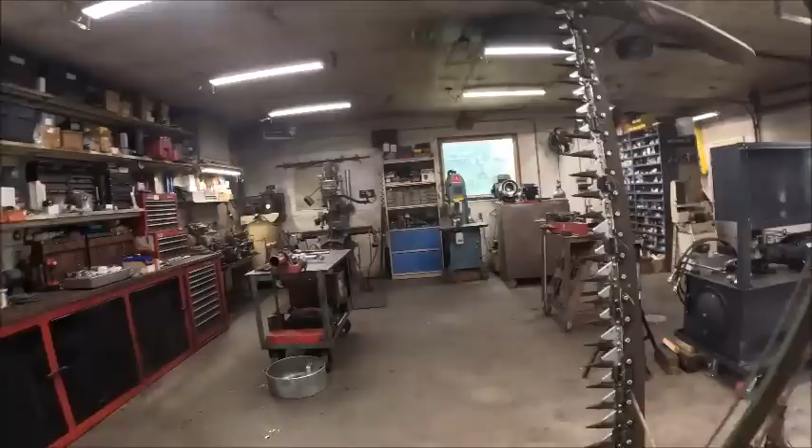Alright, today we're going to put some of these new parts on the mower, and I want to adjust or tweak some of these rock guards and see if we can't reduce some of the plugging.

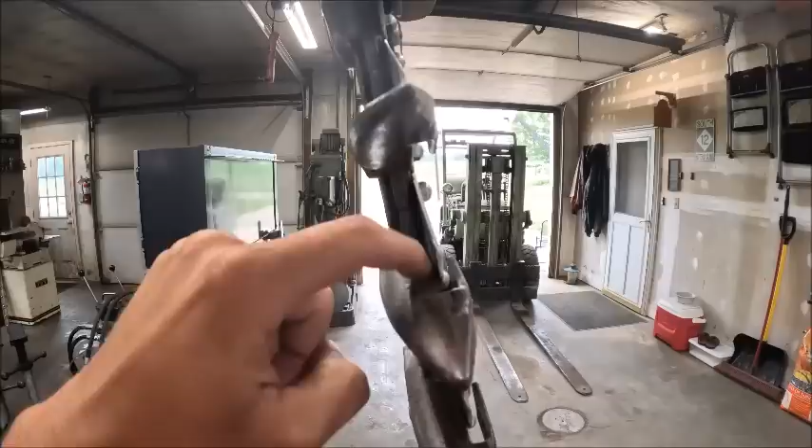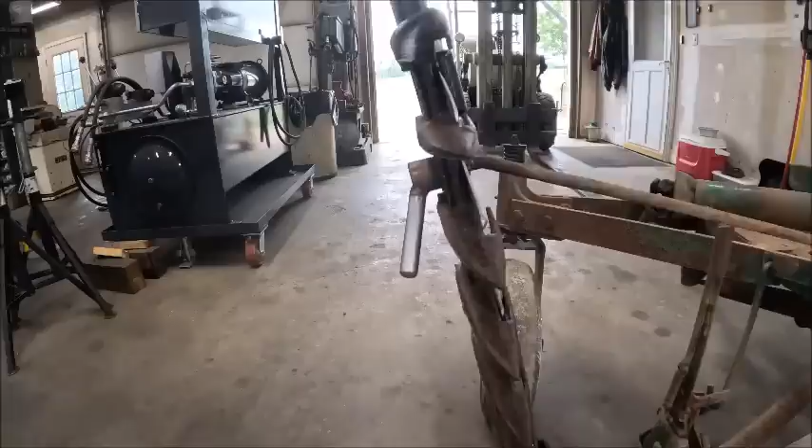Like that guy right there, he could probably stand to be bent up a little bit. Same with that one. That one's not too bad. That one could probably, that one's not bad. But I think if a couple of these up in here are, and then you get further down the bar and they're in pretty decent shape. That one right there could probably stand to be tweaked.

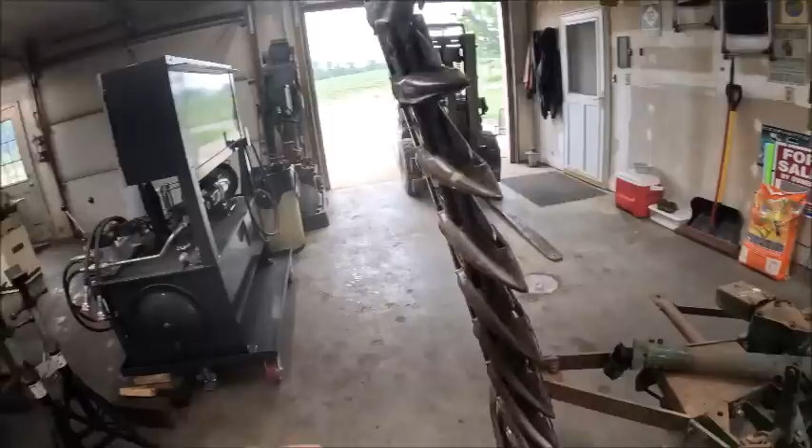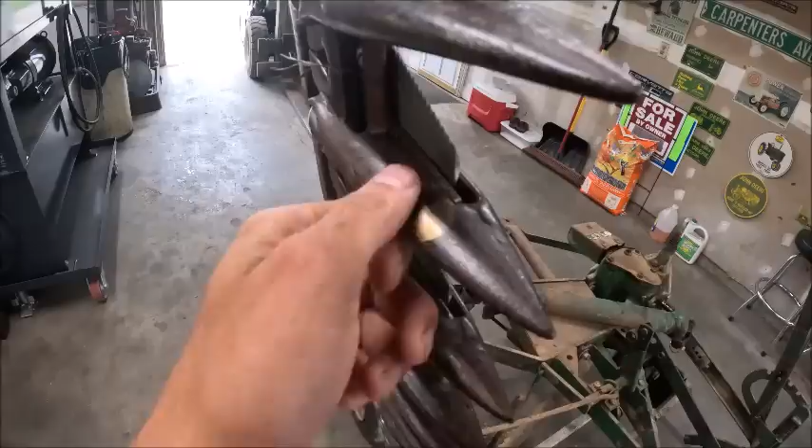One thing I noticed after I mowed with this, which one is it? Oh, this guy right here. Apparently this one's been broke before, and you know, Depression era farmer mentality, that the guys who grew up in that era saving everything, and we don't need to go get a new one. We just braze that thing back together, which they did a really nice job, because until it shined up you could never see it. So that one's actually been fixed.

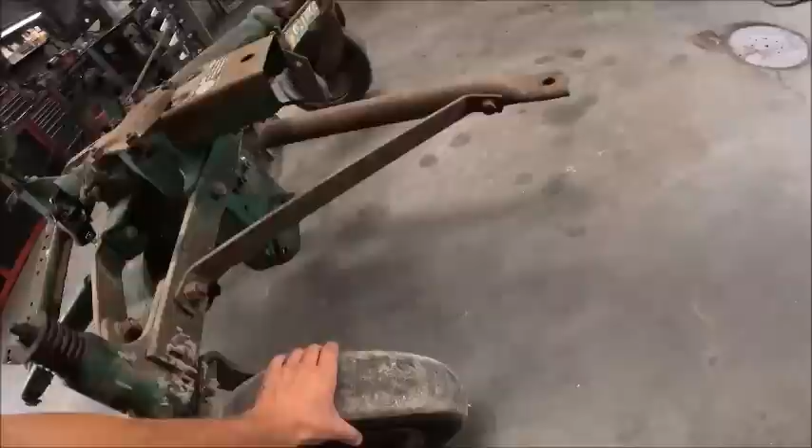But first thing we're going to do is put a tube in this thing. I got a different actual name brand tube, not just a TSC box tube. So I'm curious to see what actually caused this thing to go flat.

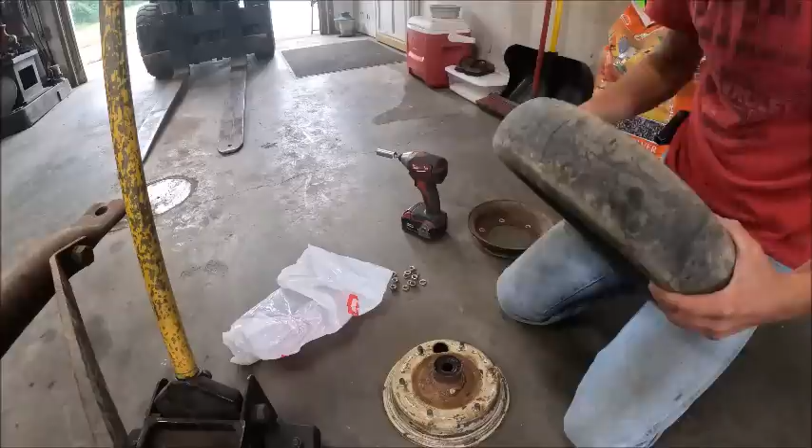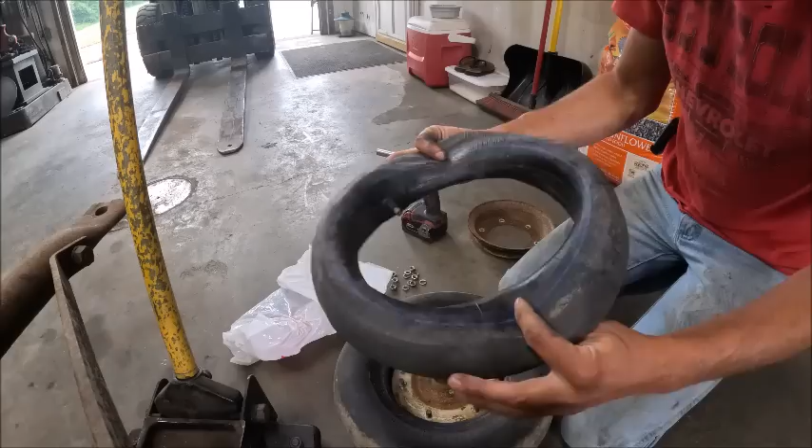Oh, well, that'll do it. The dang valve stem came unvulcanized from the tube. Garbage. Well, at least I know there's nothing wrong with the tire, so I can put this back together real quick.

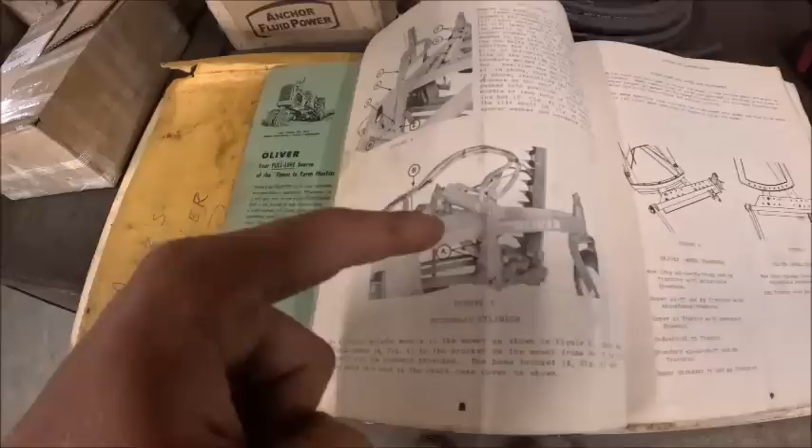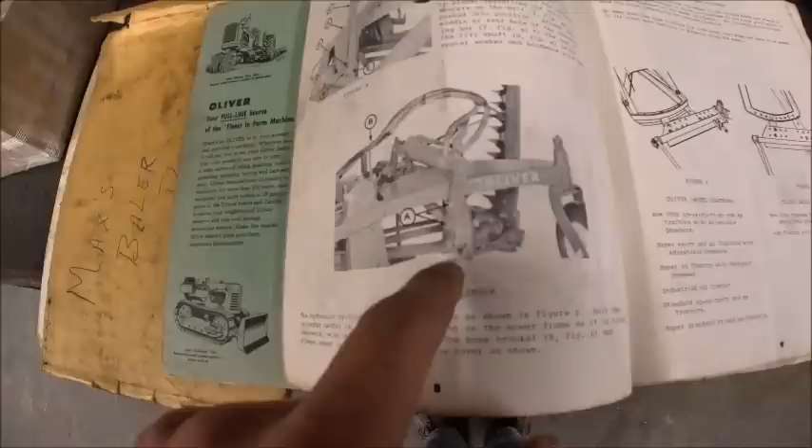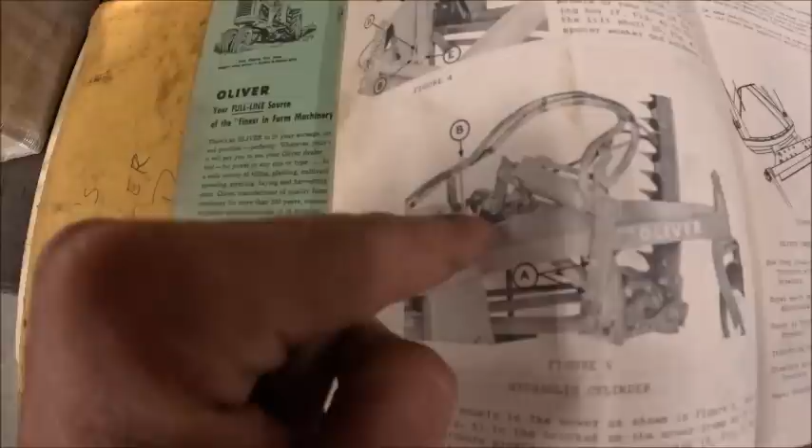Alright, so we can get this cylinder bracket and everything put on and get the lever off, and there is this right here, the installation instructions for the hydraulic unit, or for the hydraulic lift. It says you want the bracket installed tilted rearward, which the way the bolt pattern lays out, it'll mount either way, but they want it laying back. And then the hose standoff mounts on this back corner bolt or back corner stud on the gearbox.

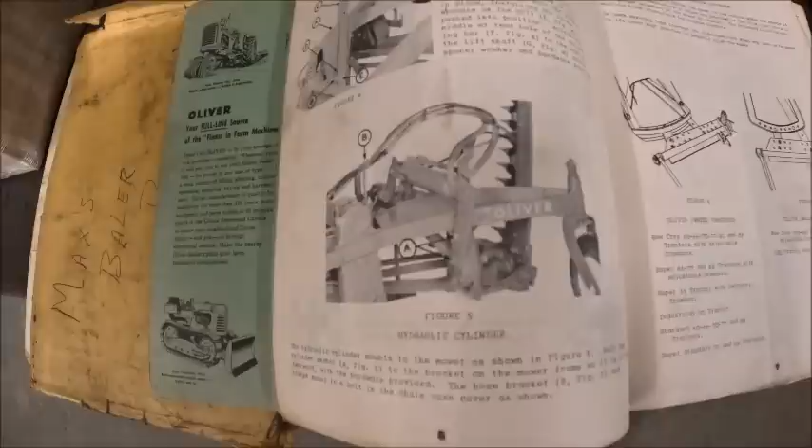And if you look right here, that little guy right there, that's your wire for the hydraulic.

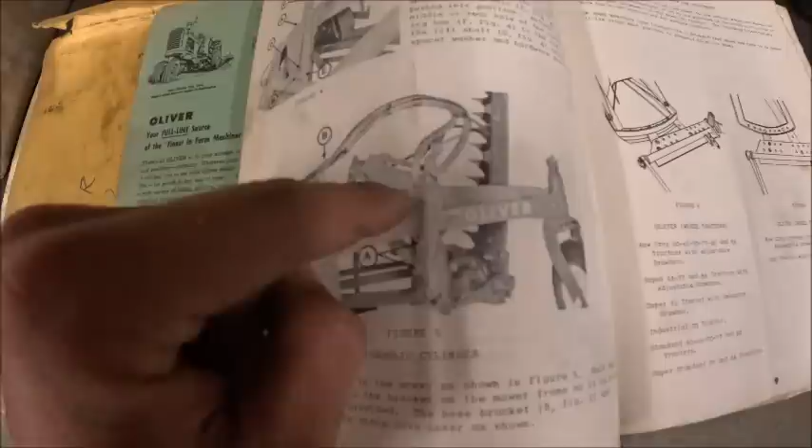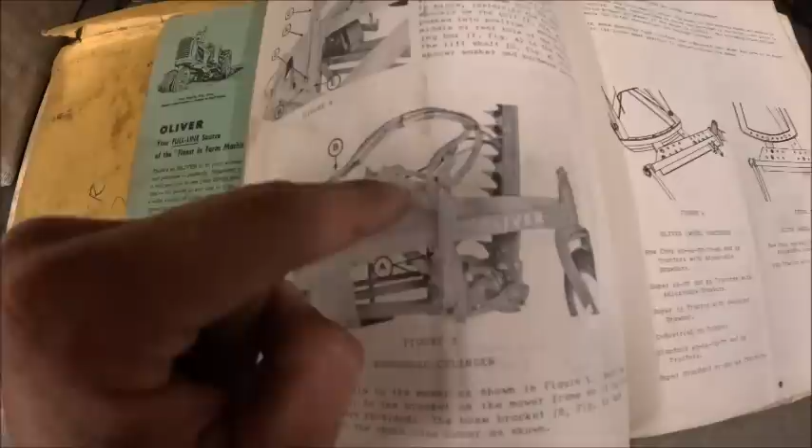Then this is actually, this would be a second gen. I kind of forgot about this cylinder. So there's a first gen, a second gen, a third gen. There might have been some other ones in there. But this is actually the same one I've got on my 540 planter. It's a welded steel tube, and the end gland's held in with a snap ring.

So we're putting the heavy cylinder on it, because that's the one I've got laying around loose. I've actually got a second one that I found yesterday when I was doing some stuff in the barn, and I don't remember what it came off of. So, well, I got more than two, but there's another one laying down there loose. But anyhow.

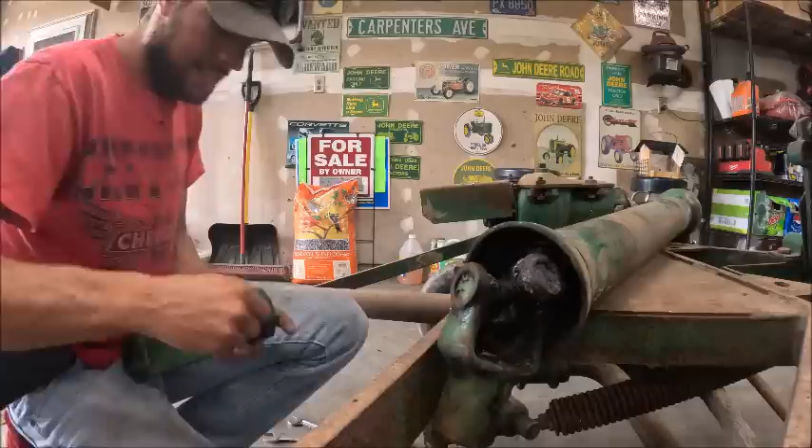Hose bracket. Tilted back, which is going to be in this position here. Did I say hose bracket? I meant cylinder bracket.

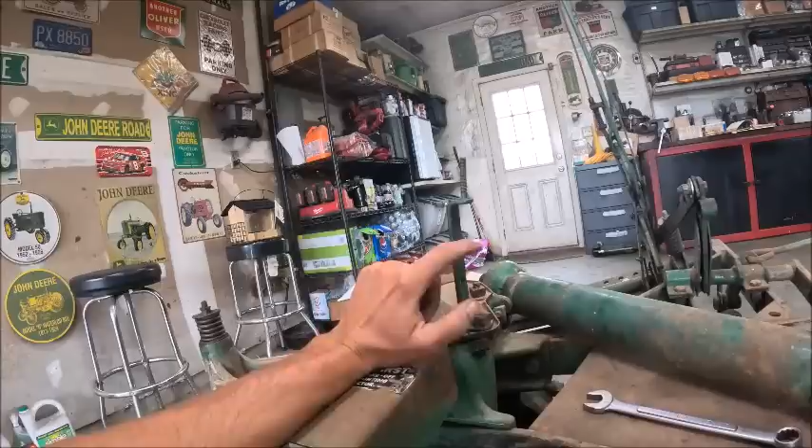One thing that I'm missing, because it was hard to tell in the parts book exactly what this was. I was expecting a round rod like all the other stuff. I wasn't expecting this. I'm missing the hose clamps, and I might have some up there on a planer possibly, I think.

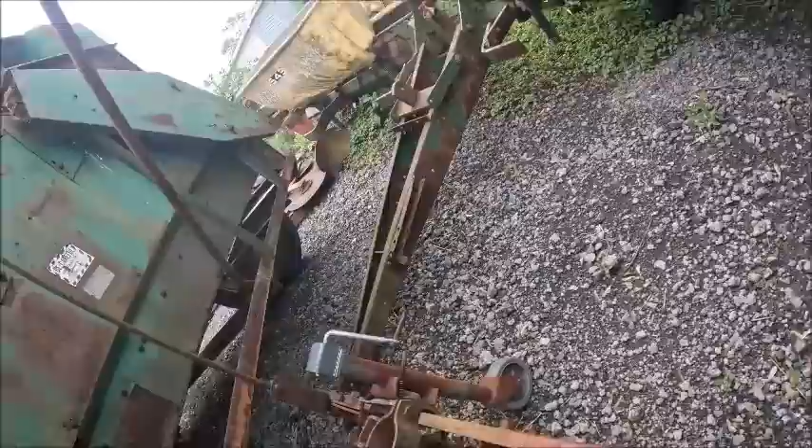Alright. Well, that would figure, both of these are, oh no, this one's got it, but it's wrong. This is what I was expecting it to be. That one's missing completely. Because this is what they're supposed to be, is just these stamped steel.

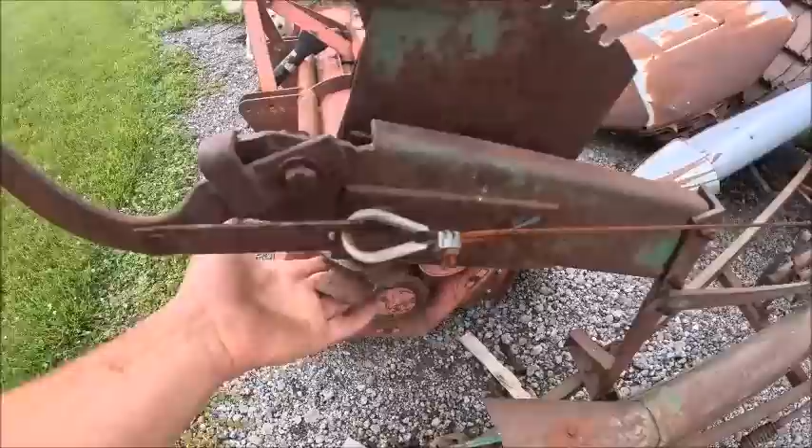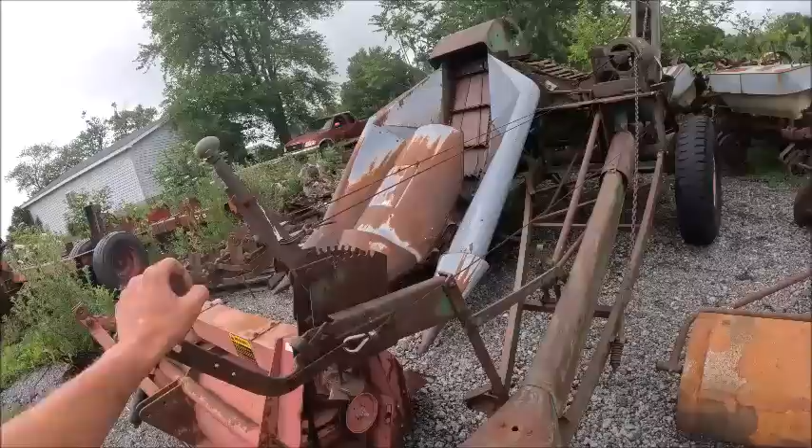I just don't want to steal them off the picker. Not that I'm going to use the picker anytime soon. I just don't want to rob any parts off of it for anything. I don't think I've got any laying around anywhere else either.

Well, let me go look. Otherwise, it shouldn't be that hard to come up with something in place of it. We don't got any hydraulic lift plows for parts. Well, I do. That hydraulic lift plow is for parts, but that's a different style. Actually, that hydraulic lift plow is not for parts. I want to get it, I want to redo it, because that's a hydraulic lift model 100, which we don't have any hydraulic lifts other than that one. Or no, was that a 100? Or that might have been a 214B. That might be a 214B. I can't remember, it's been too long since I saw it. Anyhow.

Okay, now the finger pinch and lever assembly can come off.

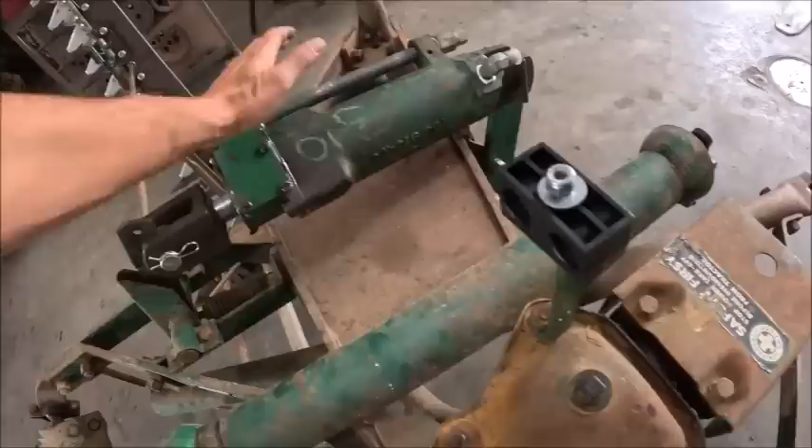Alrighty. No more lever, okay, cylinders on. This is what I came up with for hose clamps for the time being. I'll probably try to find some original steel ones eventually, but these will at least get us going. Can't make the hoses till we got it hooked up to the tractor, that way we know how long they have to be. But next thing I'm going to work on is the divider board.

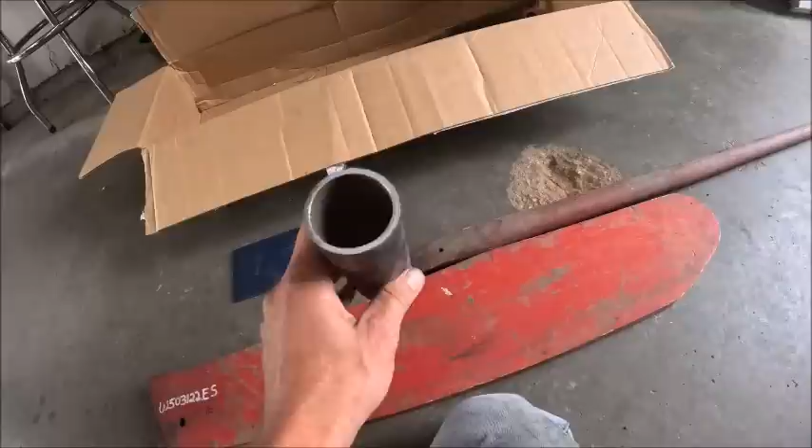And for that, we have to make a way for this to attach to it. The steel one that replaced that has two holes, and it's got this kind of duck-foot shaped piece stamped out on the end of it. So I'm going to try to mimic this-ish.

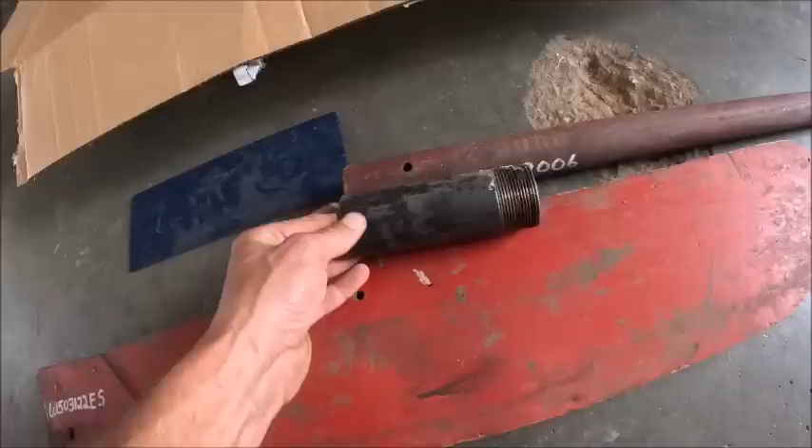The extension stick doesn't quite fit in this pipe, but if you split it lengthways, it'll probably spring open a little bit. Actually, I'm probably going to have to find a longer piece anyhow, though. It should be alright, because I'll just cut it off right here. Cut this at an angle and weld it on here to act as a socket for this to go into, to support it, and that'll be the plate on there like that. So it shouldn't be too difficult.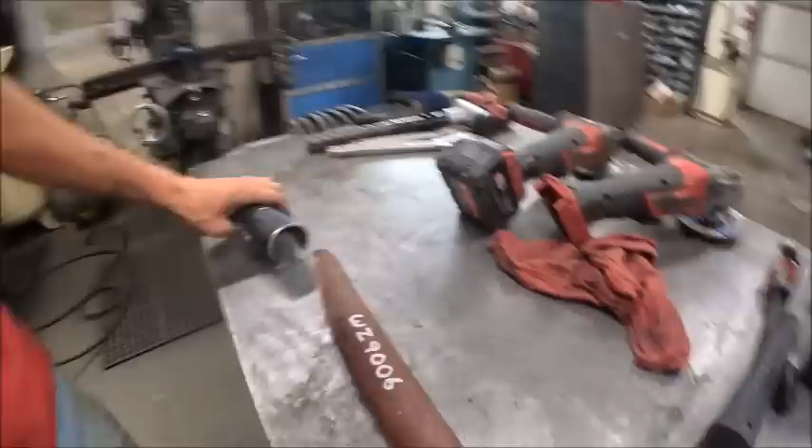Alright, there's what we come up with. I thought about cutting another piece of plate and boxing this right here, but I decided against it because if this thing ever breaks, I don't want to have to work that hard to try to get it back out. So if this is open right here, it gives you something to drive a screwdriver or something in and get it pried out, rather than having to drill the thing out and take it out in pieces.

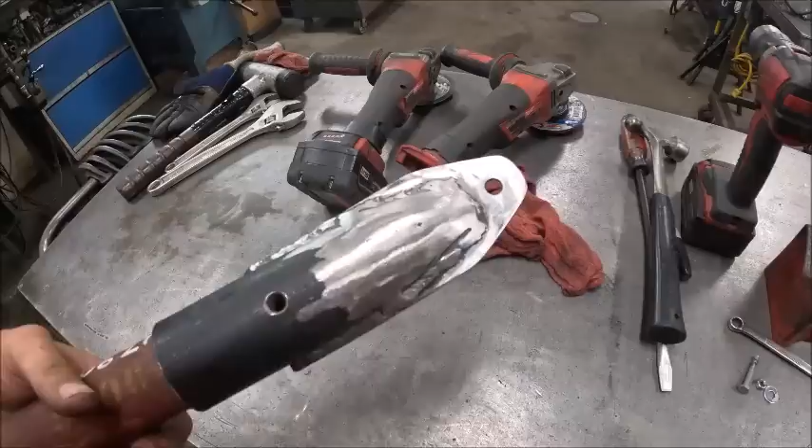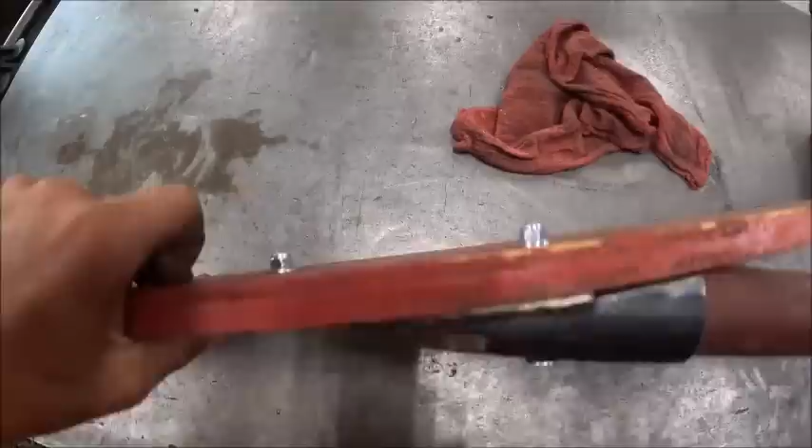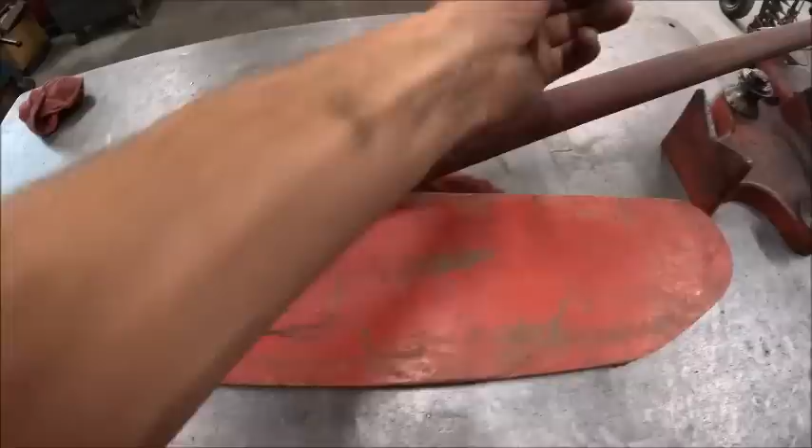So let it fit nice and tight, bolt holes line up, so it should work. Just got to find some carriage bolts long enough and square the holes out real quick. Not gonna lie, that turned out even better than I had it pictured in my head. Started it off in the middle hole. That's probably not too bad. Throw some paint on it, make everything match. You probably never know it wasn't factory.

But now we can lay the bar down and we can put that on.

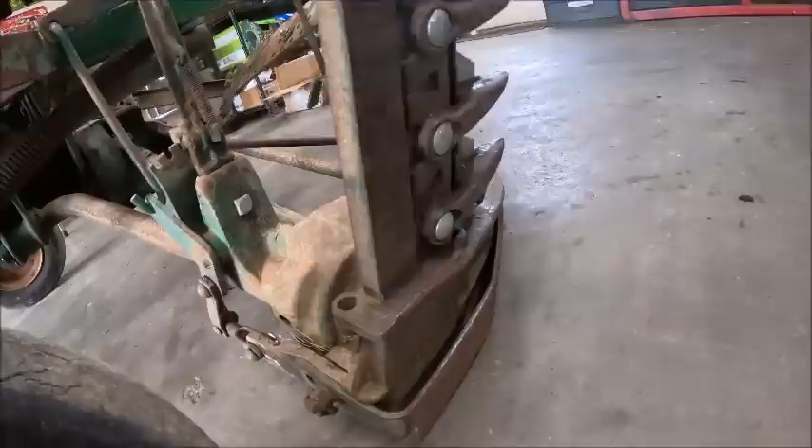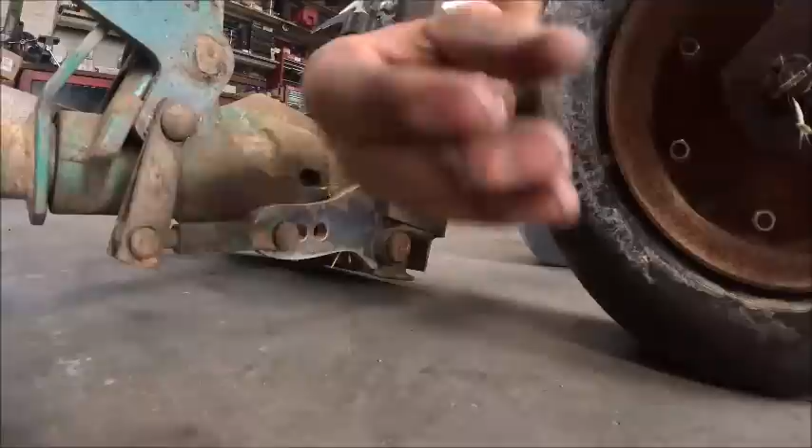Before I lay the bar down, while I got it up, I want to adjust my cutting height a little bit. It sounded like the vast majority of people kind of agreed that it needed to be leaving a little bit more stubble. So if I drop this down one hole, that should give me another inch. So I need a 3/4 inch wrench.

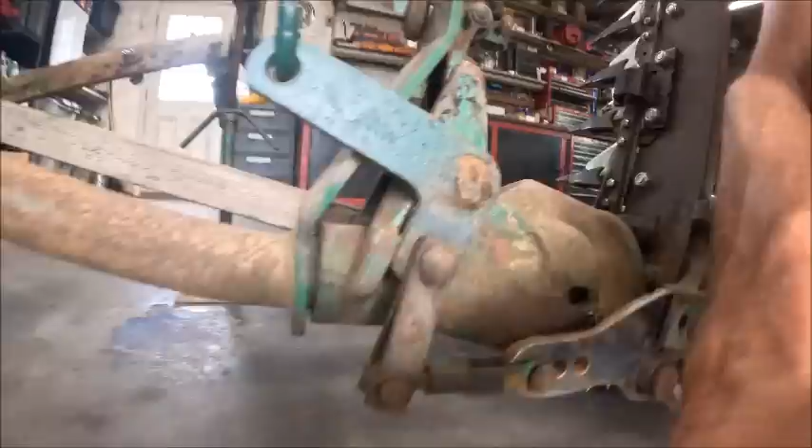Except this is not going to let me lift the bar up because I can't take the bolt out, so we're going to have to lay the bar down anyhow. Well, I don't know how that got so tight.

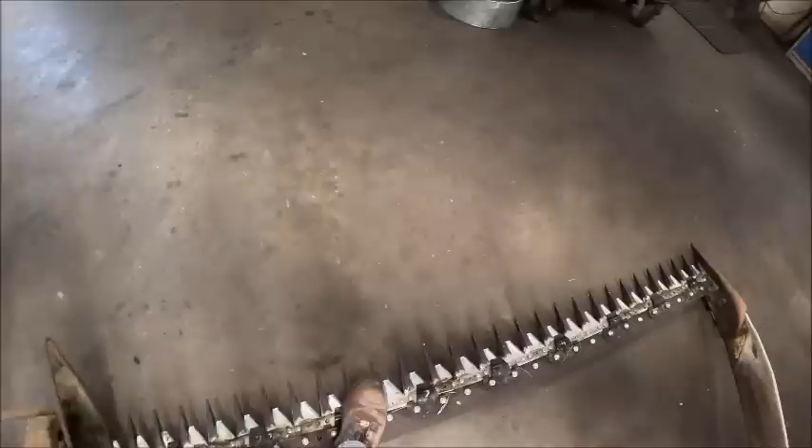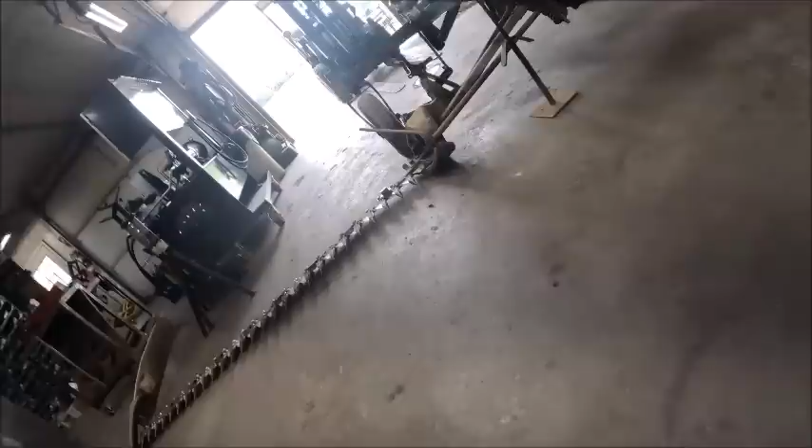Okay, now we can adjust that. You know, I wonder, is that side on the ground? Yeah, that side's on the ground. Granted, the bar is going to be bowed somewhat in the middle. Where are we at here? Oh, that's 2 inches. Let's give her a little more.

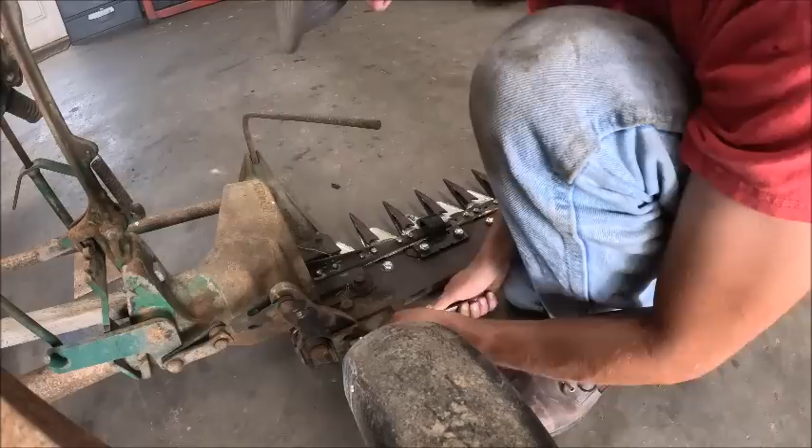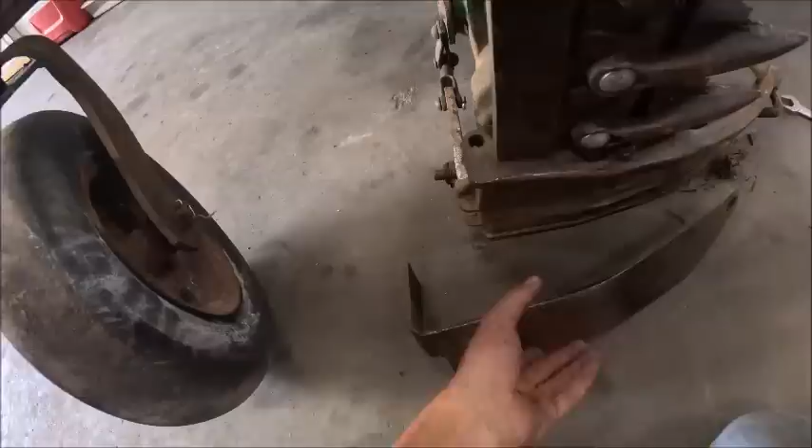Come on. Well, I don't think you can actually see what I'm doing there. Here, now you can see what I'm doing.

Sounds like the neighbor's cutting hay. I hear a discbine. So now it's going to rain again.

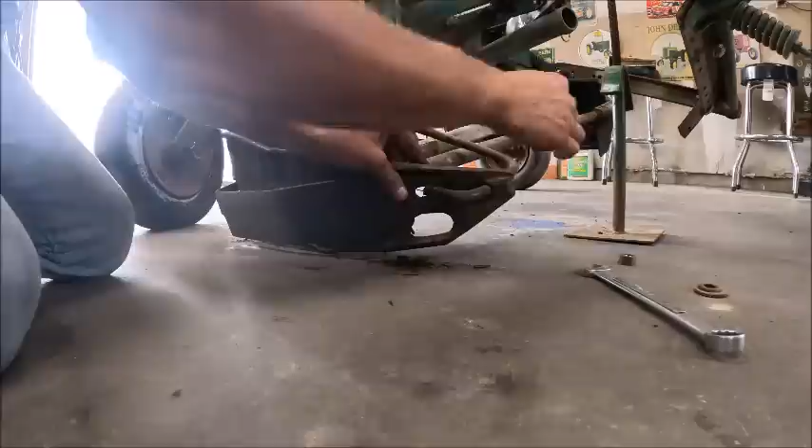So as it would turn out, it's easier just to do it with the bar up and undo the front and rear bolts on the skid shoe both, and then you can just go right together with it.

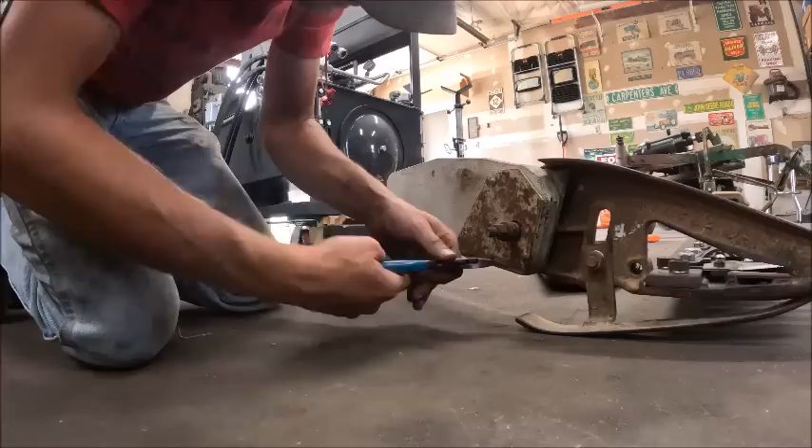Alright, I got both shoes dropped. That got me to about 2 3/4, a little over a cut height. It looks like a lot more than that, but that's what it measures, so that's what we're going with. So now we can swap out our windboard here.

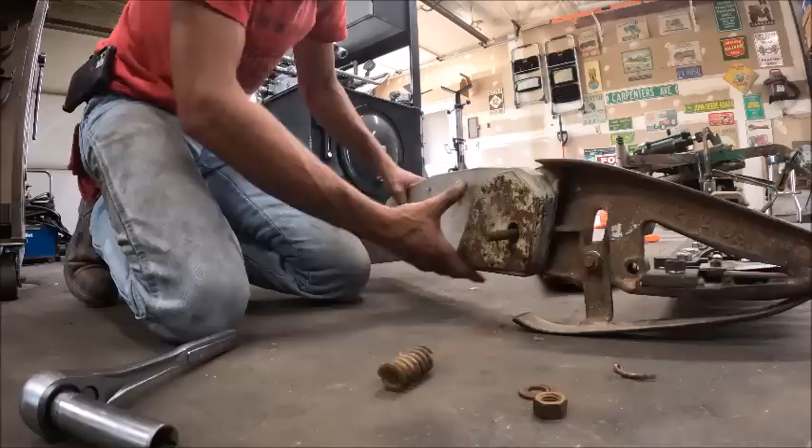Swathboard, divider board, whatever you want to call it.

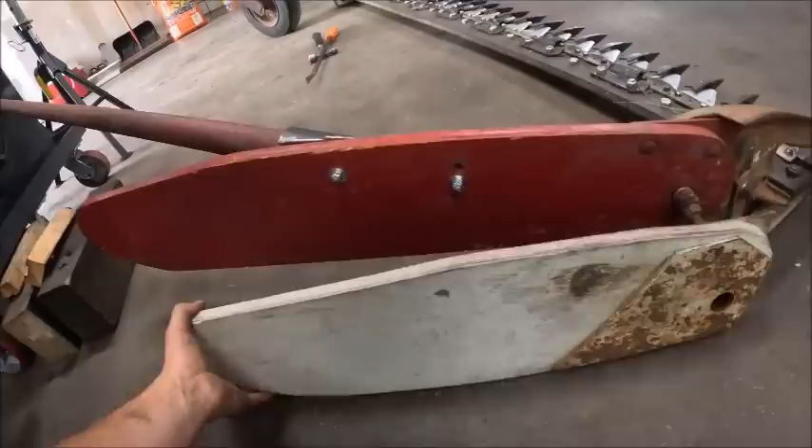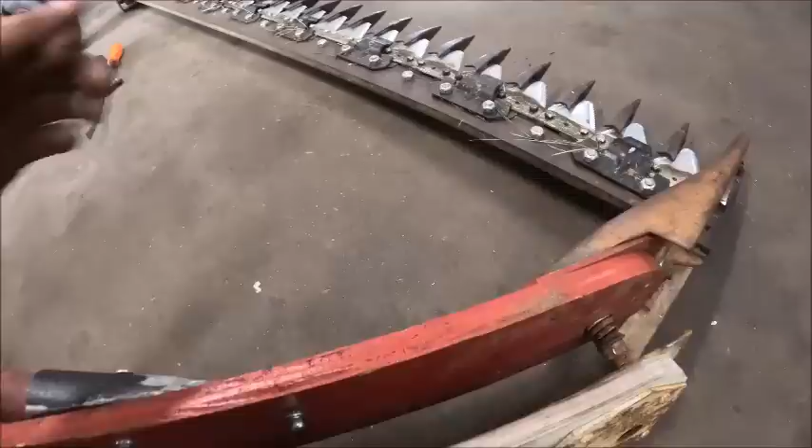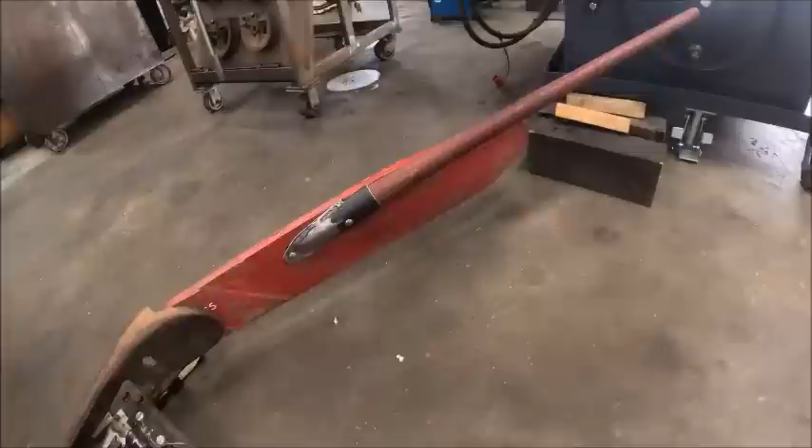And that one is pretty significantly longer. But it looks like this one was probably shorter to begin with. But we'll see how it works. I'm hoping it, like I say, I hope it leaves a wider track for running the mower head in, because before it was only, I mean, it was barely wide enough to run that in, so hopefully we'll see.

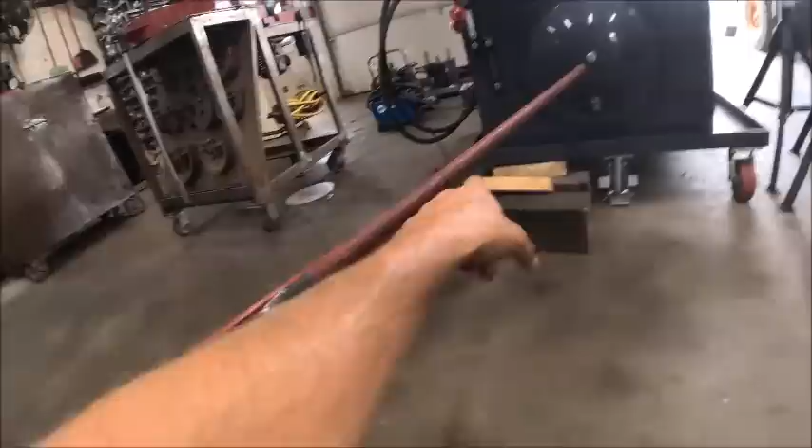Now I know for certain that the extension stick is going to help, and it might not be a problem, at least this year on second cutting, because second cutting's coming back so slow due to lack of water, even after we got rain. But especially on that first cutting I was doing, there were spots where the grass was tall enough that you'd be driving along and it would start to lay over, pushing on the grass cut over here, and it would get to the back of the swath board, and the pressure would flick it back over on top of the uncut hay. Then you'd have to try to run over that without plugging up by the cutter head or the drive head on your next round, and it just makes a bit of a mess.

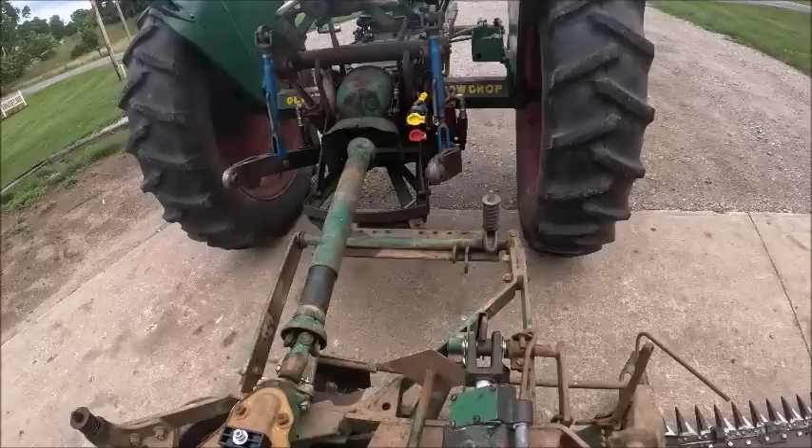So that for certain ought to help. I hope. Would be nice. That's the way it's supposed to work anyhow.

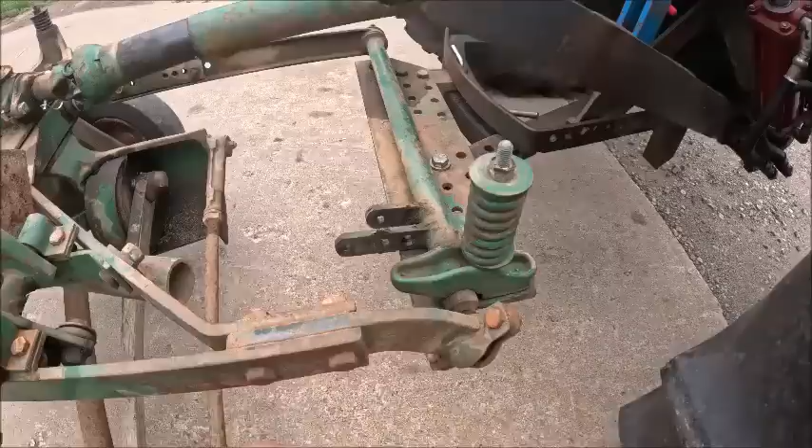I tell you what, this thing is like 20 times easier to hook up without that handle on there. Now that the drawbar will swing all the way over, you just stand it straight up on end, back the tractor all the way up to it, flip it over backwards, and that lets it clear everything. Because you stand it up with the spring down, you can flip it all the way over. Once you back the tractor up to it, everything pretty much lines up. You can pick the floating side up enough that it'll let the tab slip in - it's easy now.

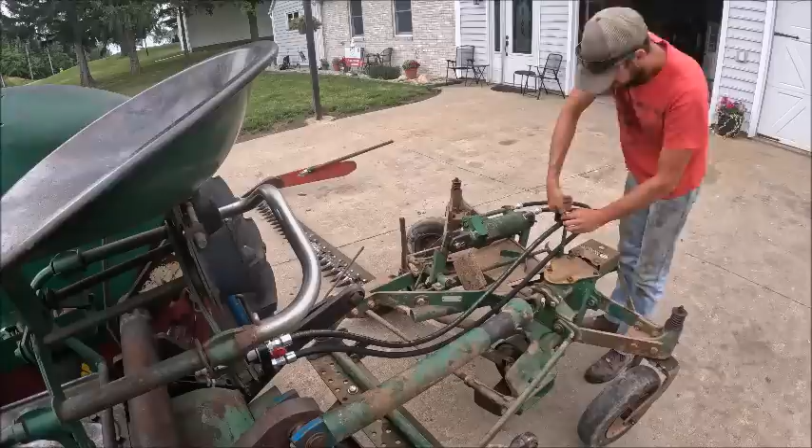So all we gotta do is make some hydraulic hoses, and we should be good to go.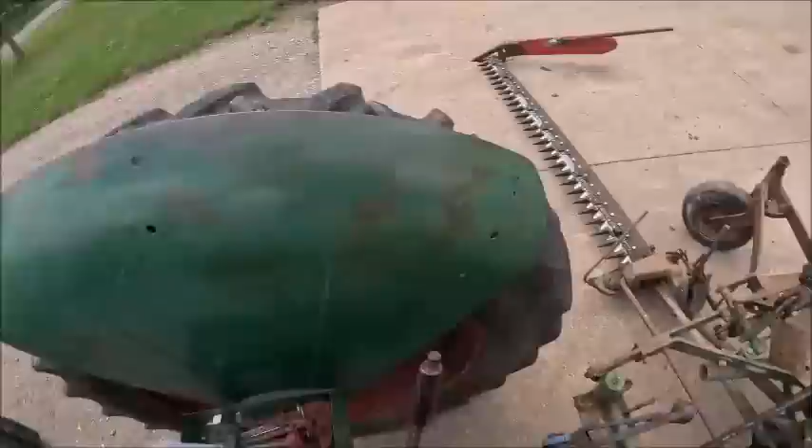All right, hoses are on, everything's tight, so I guess all that's left to do is put oil in the cylinder. And see if I got the hoses hooked up. Oh yeah, we're hooked up the right way.

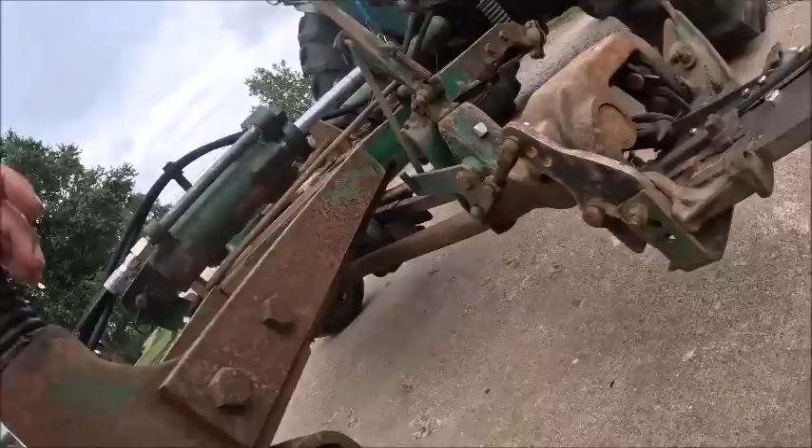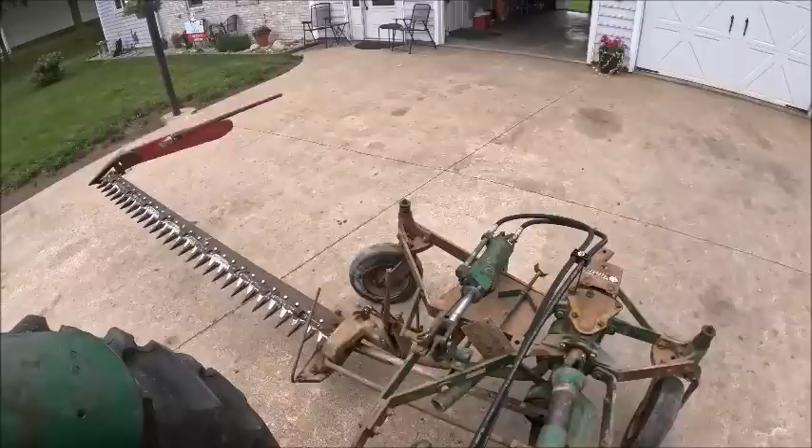That is so much nicer. My God, you guys have no idea how excited that makes me. And it picks up a heck of a lot higher too. Which is nice.

This is gonna make mowing that patch so much easier. And just mowing in general. It sets down nice and easy. Oh, that is beautiful.

And being able to feather it like that to finish up cutting your point rows and stuff without having to hold the dang handle is gonna be spectacular.

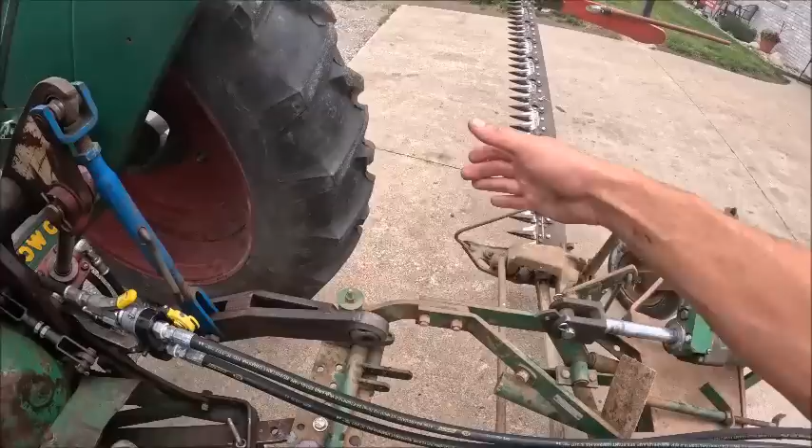That is going to be so nice. And the other problem I was having with the handle, especially cutting on that hill - if I was cutting with the bar downhill, the 3-point arm, because the handle would be back here, the 3-point arm would swing over here because we're downhill, and then you're on the outside of the handle. Then you come to the end and try to pick up the mower, and you'd get all tangled up in the 3-point arm, and you couldn't get the handle far enough in to latch it. So you'd have to stop on a flat spot, let the mower back down so the 3-point arm would swing in, and then pick the mower back up, which was a little unhandy.

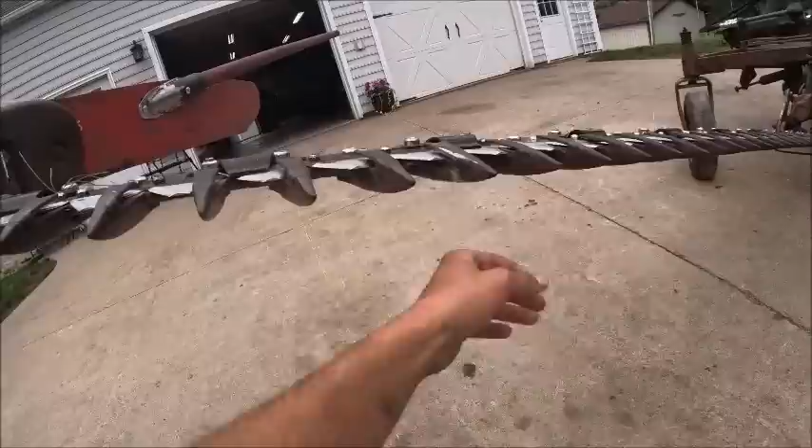But that is gonna be nifty. And with the handle, I mean, that thing would barely - it'd get the bar off the ground, but just barely, just enough to skim over top of your cut hay. You ain't got that problem now.

Oh, now I want to go cut hay.

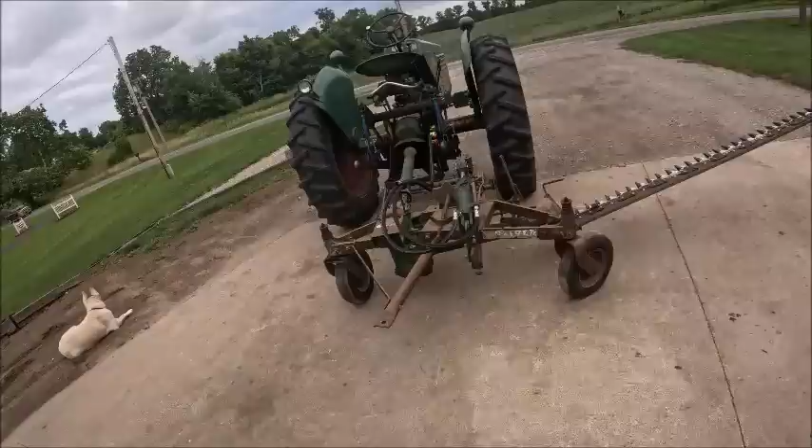And I did try tweaking some of these guards, and this guy right here cracked on me, so I quit. Luckily they're steel, and it actually welded beautiful, really nice, no popping, no nothing, just laid in there like it was meant to be. But because of that, I just decided we're just gonna leave them the way they are, and I think everything's gonna be okay.

But yeah, now I'm excited. This is gonna be lit. So, yeah.

But I guess all I got left to do is top off the hydraulic oil in the 77, because now she's going to be low since that cylinder's full, and put her back in the barn. So that's just, that makes me excited. I'm ready now.

I texted my one landlord that's got another little piece that I can't get to with row crop. Well, I kind of told you about it. It's been a while ago, but it's another section of power line right-of-way. And I told him next time he's around the house, let me know, because I wanted to talk to him about it. So hopefully that comes to fruition and I can put in a little more hay and have a little bit more space to play with this thing, because it's actually pretty fun. Once we get all the kinks worked out, it's going to be really fun.